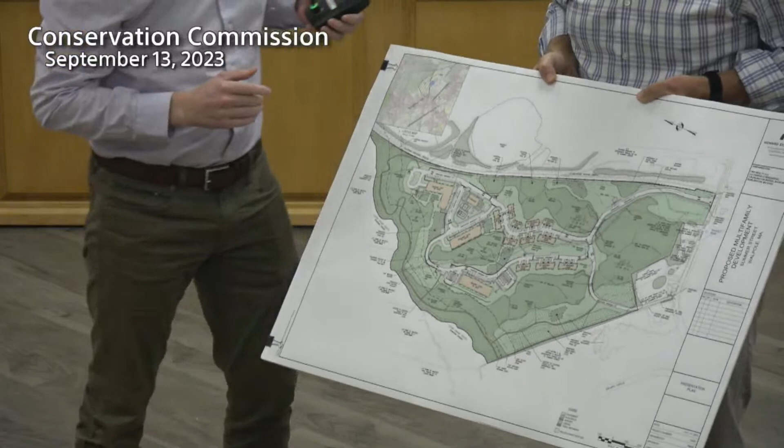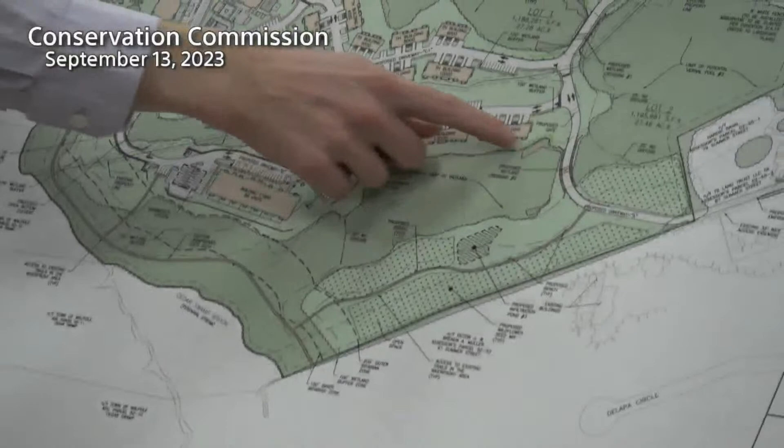Just stick that in place for the stuff. Yeah, we can kind of both go through a little bit. So the peer review went through and looked at the changes as part of the modification. The primary changes added as far as drainage infrastructure goes are the 2 additional StormTechs here and the infiltration pond that takes the runoff from the emergency access section. Tetra Tech had some additional tweaks they wanted to the infiltration rates since there wasn't direct testing under the system, so some of those in situ testing methods were used for the perc rates. We agreed with their analysis to change those to 1.02, which had a small increase in size from the past plans you had seen. That was the most conservative rate, and we thought that was a good way to deal with the situation, so we agreed to do it.

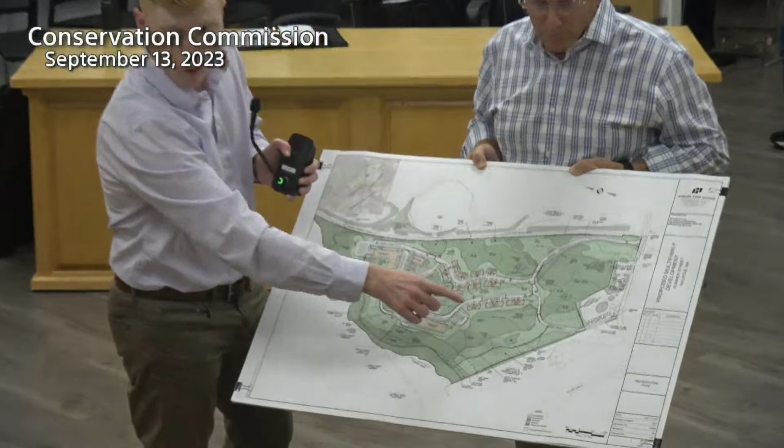So these reflect the size that you see here. The other notable change is this section of the emergency access used to be 24 feet wide over the crossing, then necked to 20 feet. There's no additional development happening on this side other than the infiltration pond. One of his comments was to maintain 20 feet the entire way instead of going to 24 feet. So that's been reduced, and subsequently the crossing has been slightly reduced as well, reflected throughout the plan set.

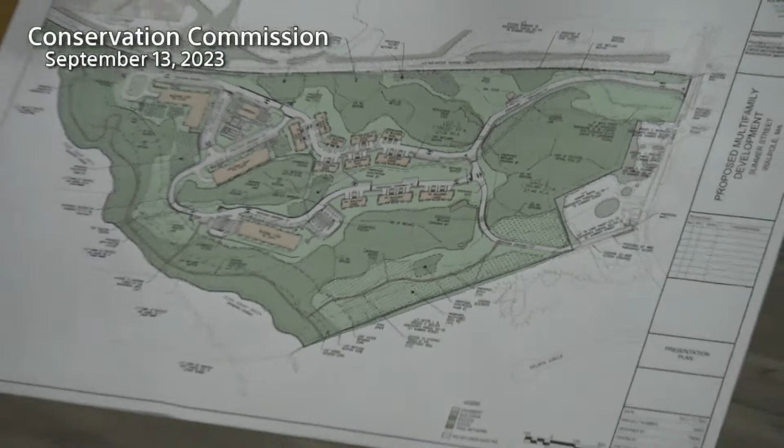Additionally, there's the wildflower seed mix being proposed throughout the cut areas that aren't proposed to be maintained as grass, like for an access berm or something like that.

And then we have the trail shown here. One of his comments was, instead of having it come to the maintenance berm of the infiltration pond as previously shown on the approved plans, he wanted it extended all the way up to the emergency access. We've done that, as well as moved it outside of the 100-foot buffer. Landis also asked that we move it a bit away from the detention basin so people wouldn't throw their dog waste in it, which we've done. We've also added three benches for viewing wildlife, and the signs for pet waste are over there as they were in the approved plan set.

Those are the primary changes from the peer reviewer. There were some other comments that he made.

He had a question about the culvert under driveway D here. I think he was confused that it was originally a stream, and it wasn't. It was going to be just a drainage pipe that we agreed to make a culvert so critters could go through it, and for drainage. Yeah, it's sized, it's oversized actually. We oversized it for the critters if they wanted to pass through, but it's not subject to Mass stream crossing standards.

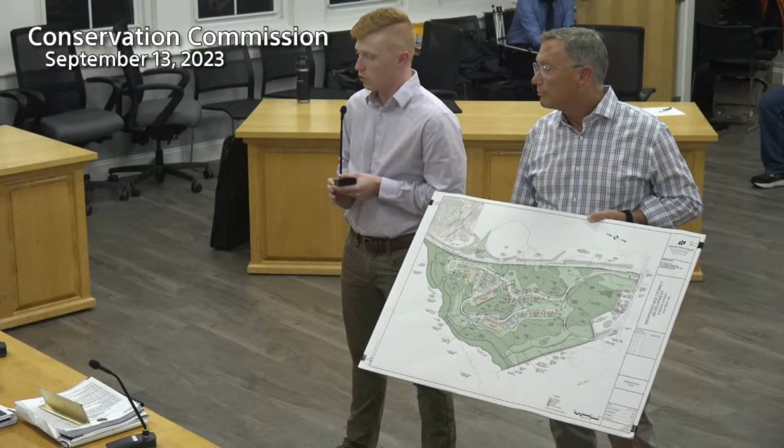But I see that some of the units have underground parking. Yep, they do. As was also in the decision, we had to maintain at least 1.88 spaces per unit, which we do comply with. There's a parking chart, I believe on the sheet you're looking at, bottom left-hand side, that details the parking per type per unit. So this does accommodate 1.88 parking spaces per unit. Yes, did you say 1.88? 1.88, yeah.

When you just look at the drawing, it doesn't look like there's enough parking spaces, but having parking spaces underneath the buildings helps. Buildings 1,000 and 2,000 both have garage unders, and then there are garages within the townhouse units, which also count towards that factor.

People love the garage unders. It keeps them from having to chop the ice off their windshields. I just moved today to a place that has parking under it, and I love it.

My only comment is a positive one. It took a long time to get the walking path to connect to something on each end, and I notice it now connects in three places, which is even better. That long battle to get the walking path to connect to something, aside from just the fact that it was there, I think is a positive.

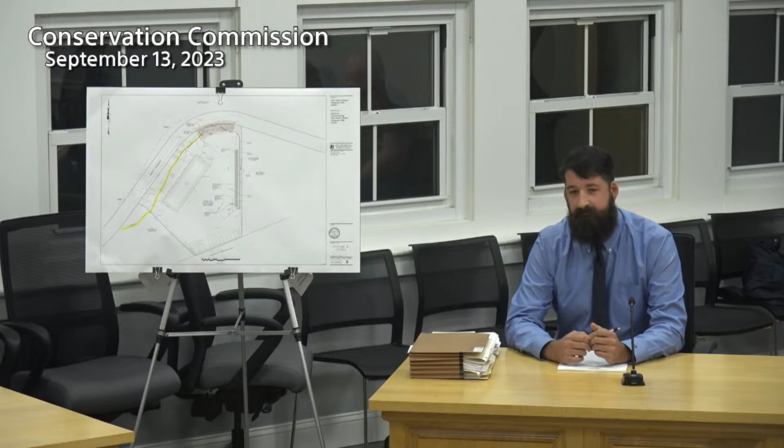Lynn? Yeah, I spoke to Carl, and he's satisfied that the revisions addressed his comments and the requirement to upgrade the system based on the NRCC revised rain data. So everything seems to be in place. Okay. Bailey? No questions. Doug?

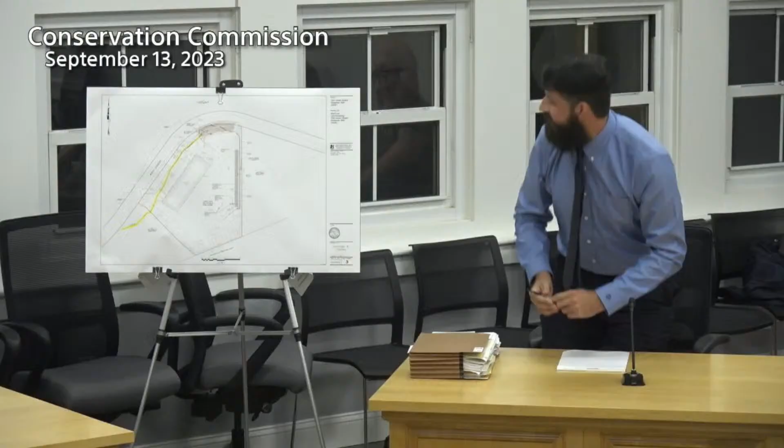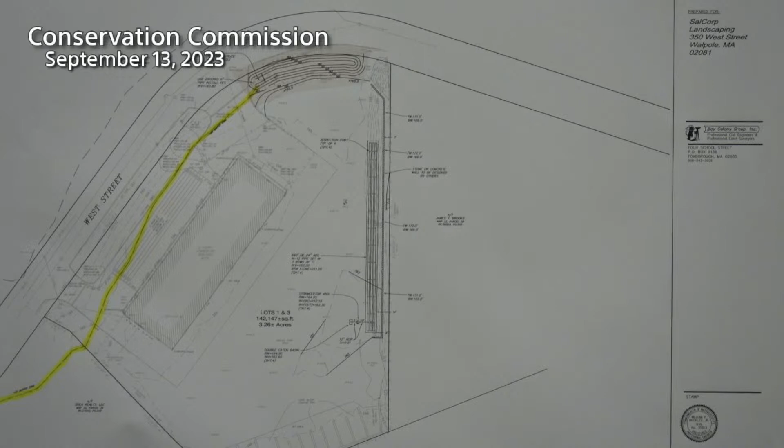No questions. Al? Okay, my question is, how does stormwater get to this new row of infiltrators? So if you look back here, I have a proposed double catch basin, and then that feeds into a drain manhole, which feeds into my row of infiltration chambers there. So he chose a natural low area that's already on the site there. So you're expecting all the rainfall in the back here to go to that one catch basin? Yeah, so based off our topo that we did when we did the existing conditions, you can see that although it's not massive slopes going back there, that's where the water wants to go, sloping back to that area.

See, now I have a problem with that, because when I see all this flooding and washing out of drain systems and such, because the system can't handle the flow of rainfall.

Okay, so I'm not satisfied that one catch basin for that whole area is sufficient. I would think you'd have more than one. That's the only thing, I have no problems with anything else. I just have a problem with the size of conveyances that are supposed to carry this rain. I've seen rain this week that wouldn't fit into a small pipe, that would wash the pipe away before it would fit into it. And you saw that if you watched the news for Attleboro or Leominster, it just washed the pipes away. Yeah, because the system couldn't handle it. So I think we missed the boat when we only have one catch basin for a system as big as that.

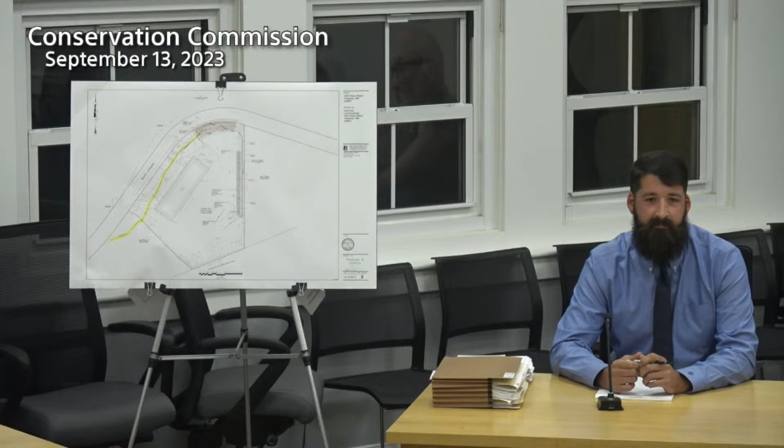Currently it's crushed millings that's compacted, so he uses it as a contractor yard and stores equipment. He's a landscaper, so he has numerous excavation things and stuff back there. So it's compacted, so you wouldn't get a lot of infiltration? Yeah, no.

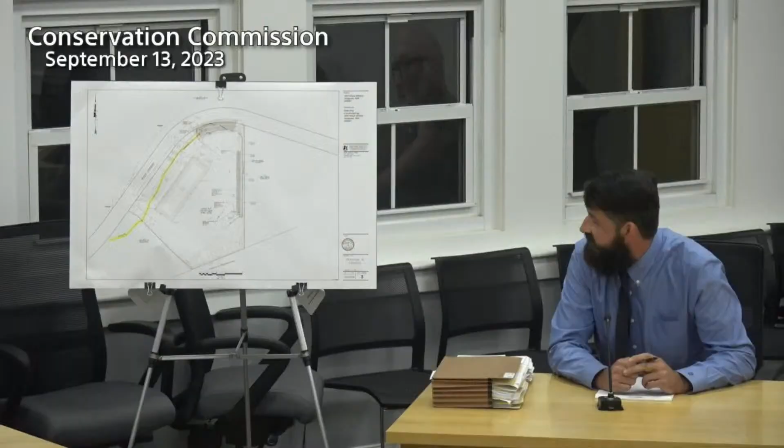What area is that catch basin serving? It's catching everything from the back of the facility. If you look at my contours here, you can see this contour right here is 165. So up by the building I'm at 166. So everything is pitching towards this low area right here. So I have my catch basin where I thought was the most reasonable spot, where all that storm water is already going anyways.

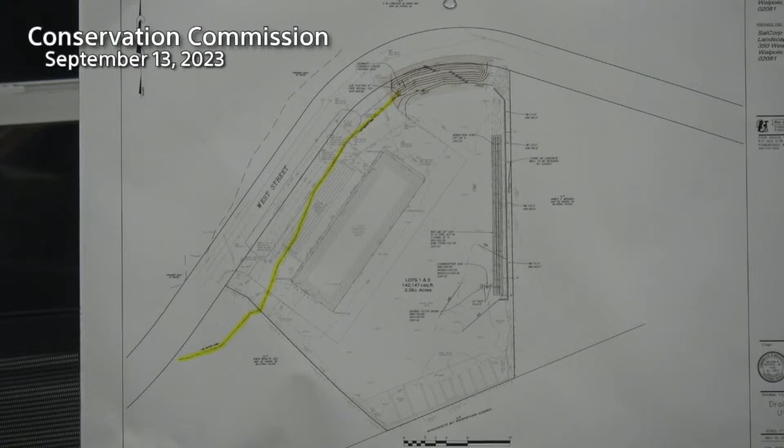Okay, and that, I'm just wondering from Al's standpoint, could that 12-inch pipe be enlarged, or is it already large enough? I think the 12-inch pipe is already large enough. When I first did this original design, this site plan was permitted by Glosson Engineering. His original design showed an infiltration basin essentially on either side of this site. We just moved it over so that way it's one infiltration basin on this side, rather than two separate ones, and it's larger now to accommodate it. Also, Glosson's numbers were designed to the old stormwater standard regs, so now we're using the NRCC, which is a higher storm standard. So when I looked at it, this design is able to handle that 100-year storm without any stormwater leaving the site.

So all the volume is going to retain on-site in terms of that back area, and it won't be overflowing into West Street or anything like that. Okay? Al, do you have anything else? I'm not going to say anything else, I've said enough.

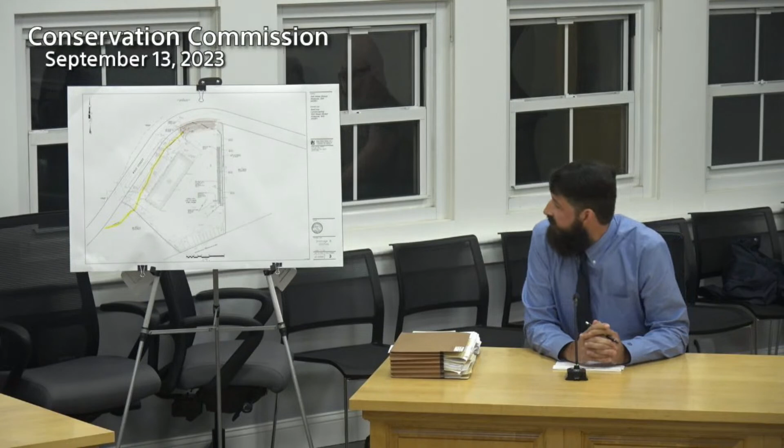If it is slow taking that water, you've got, it's higher, just under 165. What was it? It's 164.9, yeah, for the rim of my catch basin. You've got a 166 contour all around the back of the building. Yeah, and then I have a whole bunch of spot grades back there just to show that it's actually going towards that area. My point is, where would it go if it is slow taking that runoff? Where is that water going to go?

So we designed it so that the 100-year storm, if it were to pool up, it's not going to overflow out of that back area. It's still contained in the back area, which is a fairly large area. This whole back area, it would have to really fill up, since this is the high spot in this area, to get over to West Street. It's the same thing over here. It only gets higher, so it would not be leaving that whole back area. Essentially, it's kind of a bowl within itself.

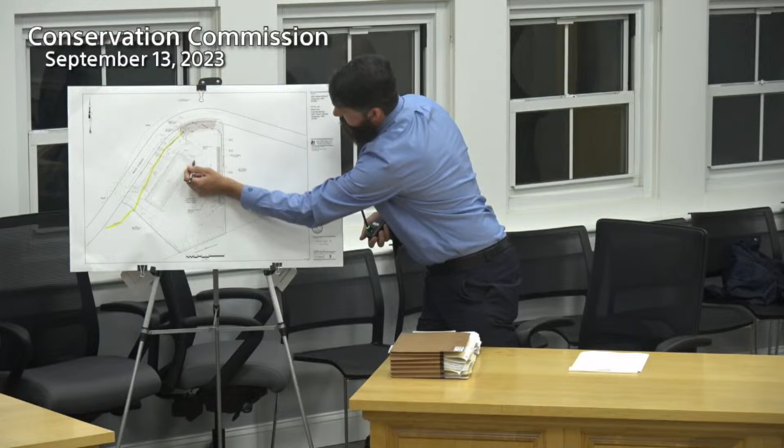Do you have that 166 contour all the way between the building and West Street? Looking up there in the corner, to the north, yeah, so the 1.6... outside of the building, is that the 166 contour? It's very light here, I can't quite make it out. Does the 166 contour go all the way across? So this 166 contour goes like that and comes in, and then there's a peak right here, and the 166 contour picks up again back over here. It's along the whole front of the building, and then same thing over here. This 166 contour comes up and then loops back into the building there.

Okay, so you've got that whole area that could act as a pond if necessary. Yes, essentially. I think that takes care of that, good point for maybe other sites. Yeah, I think for this site itself, it's sort of self-contained.

I think the other thing we have to consider is that we have to live with the specs that are published for rainfall, even though we're seeing some different results, and unless we want to change them ourselves, I don't think we can impose that on a specific case situation without making it a general policy.

Anyone in the audience have any questions or comments? Please identify yourself for the record. Yes, Doug, just a quick question. I see on the drawing there's some underground gas tanks. Is there any more information on what that's all about? How big are those? I'm not entirely sure.

So we came into this, like I said, after they already had an approved site plan, and he didn't build the drainage exactly to that site plan, and he wanted to change things. So we went out there and did our existing conditions, and I really just looked at the drainage. I think it's over on the south side, on the left side of the drawing I'm looking at.

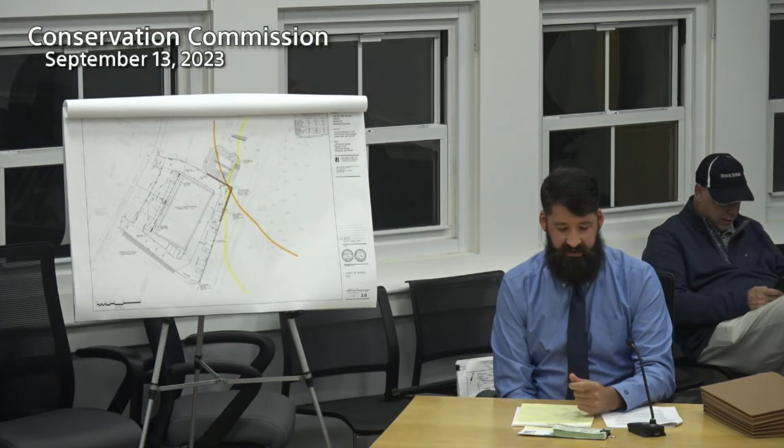It is in our opinion that the redevelopment would fall under the Wetlands Protection Act under section 10.58, which would allow the redevelopment of a previously developed riverfront area. I could go through those and show how we conform to that if anyone would like me later. No work is proposed beyond the area of the site that is currently developed.

And I'd like to point out, so you can see again, I have my orange riverfront area as well as my buffer line. And we're proposing a very small amount of impervious area now, as opposed to the existing conditions that are out there.

So the proposed building will be about 133 feet from the wetlands and 239 feet from the riverfront, where the existing building sat about 87 feet from the wetlands and 160 feet from the river. The proposed paving and grading area will be about 91 feet from the wetlands and 191 feet from the riverfront area. The existing paving and graded area is about 84 feet from the wetlands and 134 feet from the riverfront area. So both are an improvement on the existing conditions currently out there.

So there are no stormwater structures on the property currently, so all runoff just sheet flows off the property. So we're proposing a stormwater system that will capture the runoff from the roof of the new building and pipe it directly into a new subsurface infiltration system.

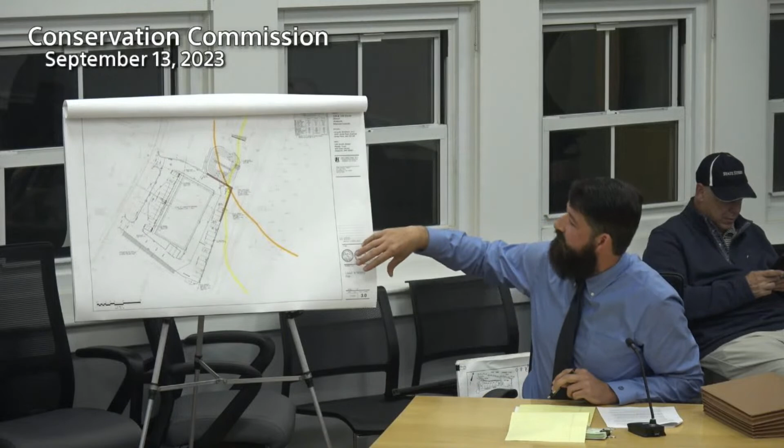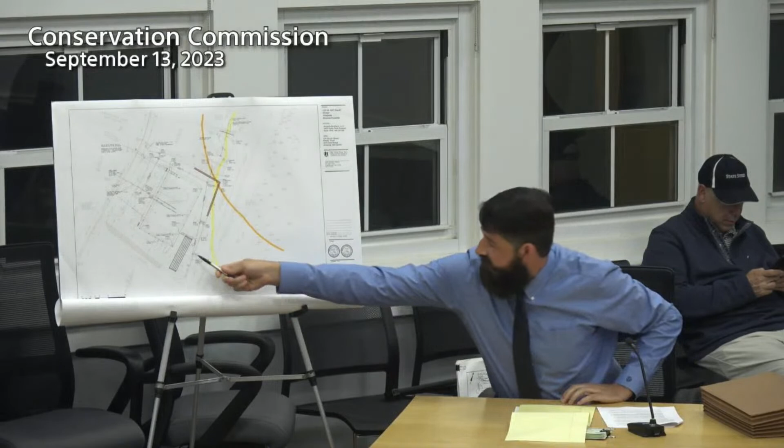I don't have it on sheet 3, but if you glance at sheet 4 real quick, you can see my roof infiltration system in the back left corner, here.

If you'd rather move closer, go ahead. Come, slide your chair closer. Sit wherever is more convenient for you. And are those plans there that they can look at? Yes, they were dropped off. You should unroll them. No, those are... I'm sorry. Okay, all right, go ahead. Okay, sorry, no problem.

And then the parking lot will be directed into a surface infiltration basin. That is located, if you look in the center of the sheet, right up here. So the system has been sized to accept all storms up to and including the 100-year storm without discharge. So no stormwater will discharge from the site.

The site will be serviced by municipal water and sewer from South Street, and we have established an erosion and sediment control program to mitigate the impacts to the nearby resource areas, as detailed on the site plan and stormwater report. That concludes my presentation.

Landis. Yeah, so Carl and I sat together and went over some of the items in his report that we would like to be addressed. I sent an email with some of the items prior to talking to Carl.

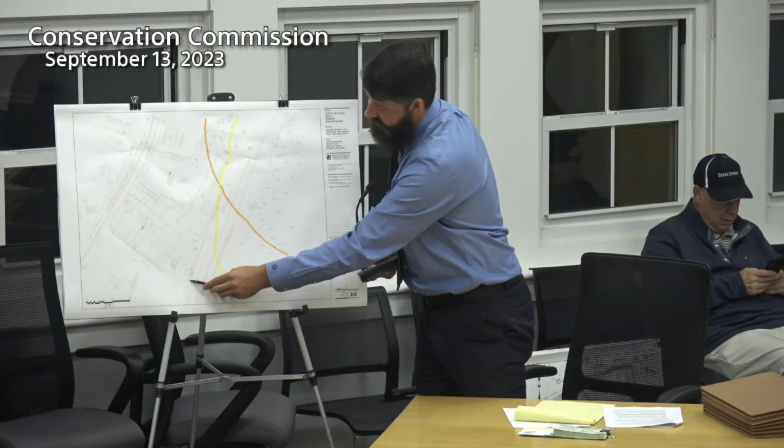So the wetlands are off-site, on the other side of that rail trail and down a slope. I'm not sure where you would... I don't think plaques would really be applicable on this application. But yeah, it wouldn't, okay.

Anything else? No more comments, thank you, Barry. Doug? The only thing, just want to mention, looks like some typos on sheets 3, 4, and then the last 5 pages. It shows the scale as 1 inch equals 20 inches.

I think that's supposed to be 20 feet. It says that on page 3, and 3 and 4, and then the last 5 pages all have that scale. It's just a typo, that's all I noticed. Anything else, Doug? That's it.

Okay, Al? Well, first of all, I'd like to see the lines for the wetland and the riverfront so that you can see them. I don't know what's the matter with their printer or their computer system, but that's the important part of this plan, and I don't see it.

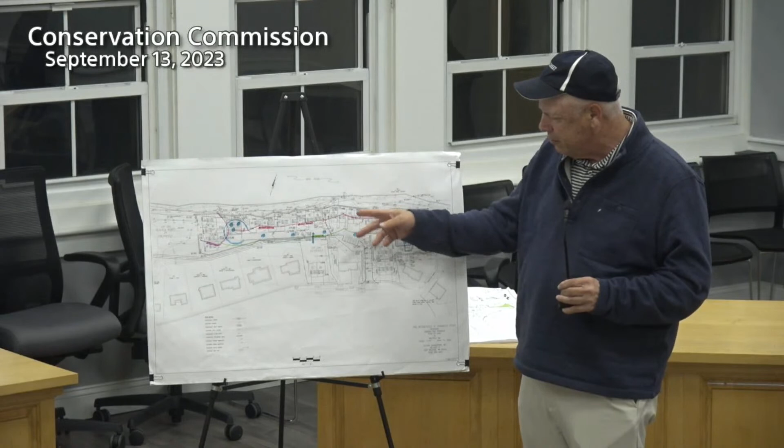And it's necessary for us to go on the site to do various testing - soil testing, surveying, and other things necessary to finalize plans. Since we last met, I've submitted this plan at Landis's request to identify the various buffer zone areas. This is the 50-foot buffer, the 100-foot buffer, and I think the riverfront area is on here somewhere.

Since we met, I've been on the property and we've cut the brush that was quite frankly overgrowing the property, which is necessary for us to get into these areas. What I've identified here is the areas where the soil testing for stormwater management is required, and also...

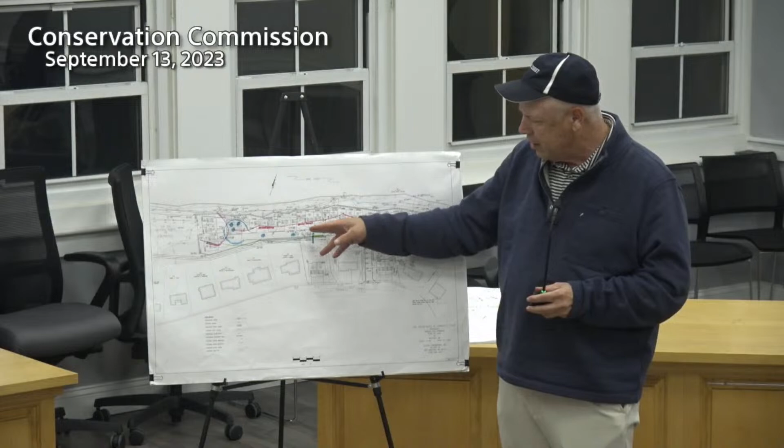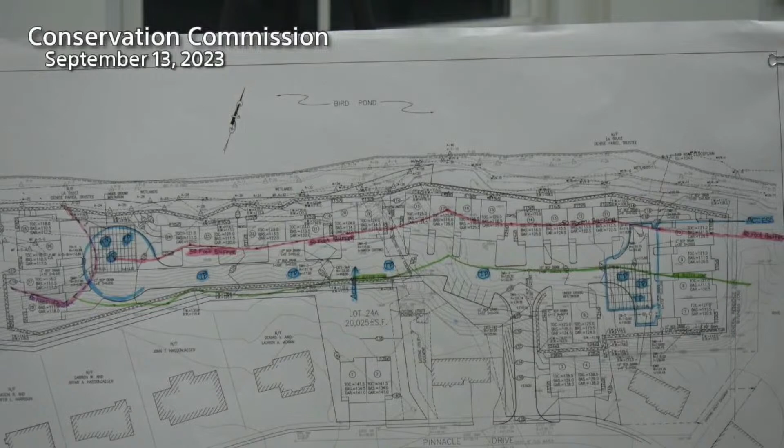...some test pits along the upper portion of the property where the proposed roadway will go. If you folks remember, you've been on the property - these are areas where lots of dumping has taken place, and it's important for us to find out what's underneath the areas that have been dumped. So we've identified these areas, and we've actually provided access to those areas, similar to this particular highlighted plan that I've submitted.

It was wide enough for us to get a brush clearing machine, a rubber-tired machine, into the property to do what we need to do. But essentially, whether it's neighborhood objection or we don't own these strips of land that go across the back and sides here, we've created our own access from Pinnacle Drive in this general location, outside the riverfront area, so we can access the property with the equipment we need.

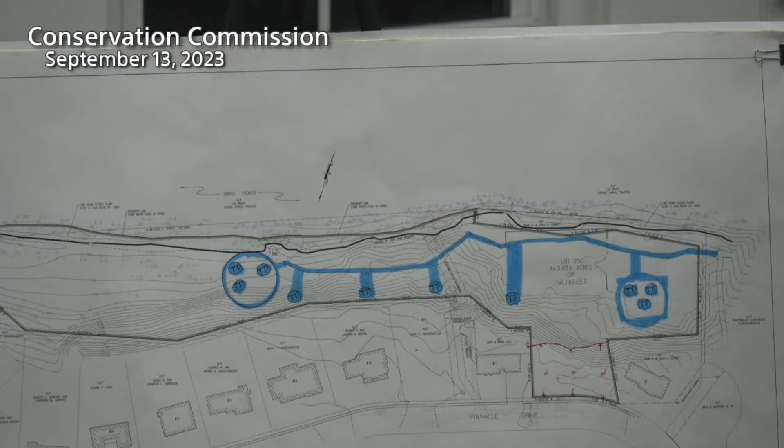So for the most part, the only thing that remains to be done is to get on the site to do the soil testing with a little bit larger machine than what was anticipated before, with an excavator to move along the property and dig these holes. And it may be necessary to use a machine with a hydraulic hammer on it, to break through the concrete to actually expose the material underneath. So it's a little bit more complicated than what I first thought, but it has to be done in order for us to prepare our plans.

So that's pretty much it for this particular aspect. Okay, Landis?

So you submitted an RDA for 9 Pinnacle Drive, requesting the commission to make a determination if the area depicted on the plan is subject to the Wetlands Protection Act, and if the proposed work is subject to it. You stated 10.02 to B2C, vista pruning for minor activities at least 50 feet away from the mean annual high water line of the riverfront area or bordering vegetated wetlands, or 10.02 to B2G, activities that are temporary in nature for planning and design purposes. And you were waiting for a determination from the commission on this RDA.

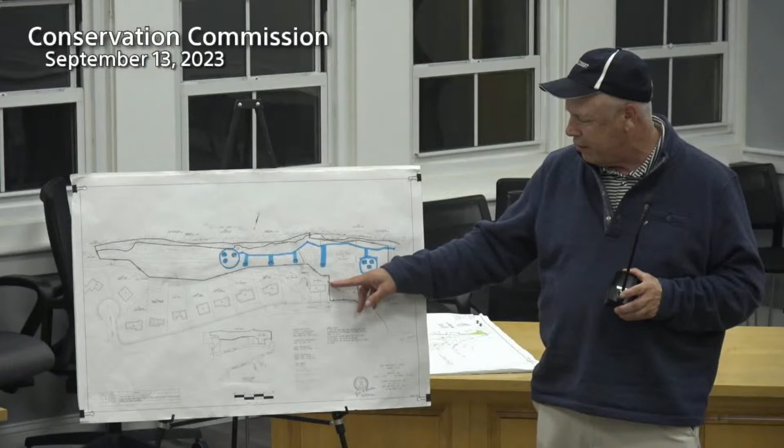With respect to that, if you are doing work, I don't know what area that is within, the riverfront or the buffer zone? There's no buffer zone, well, this is the 200-foot riverfront area. Okay, so if you're doing work within our jurisdiction, you would need to do a filing. That's all the point I want to. No, and at this point we've... okay.

I believe we've only gone to this point, and you have to jump. Okay, I'm down, just so you're aware of that. Okay, Doug, any? Jack, yeah.

Is the question whether the work he did out there was already within the 100-foot buffer zone? No, just looking at the access, if there's work done there. I don't know, what is the address of that access? This is 9 Pinnacle. Okay, it's the same lot. So it's all 9? We're all dealing with the same RDA.

So I could amend the RDA and say I need another 50 feet of access down that slope? That's the point - if you do anything within our jurisdiction, you need to come back and do proper filing and a plan showing us what you're going to do. So that was addressing Bailey's comment. Anything else, Bailey? No, thank you.

Doug? Yeah, I thought you made some good points - that if you gotta make a cut to get your equipment down there, you'd want protection with hay bales or something against water flowing down. Well, it flows down there now. But where you're gonna be disturbing the soil - not to be disrespectful, but this is a concrete slab here, there's no erosion going on that's going to alter the concrete slab. The point is, whatever you're doing, if it's within our jurisdiction, you need to show us on a plan what you're gonna do.

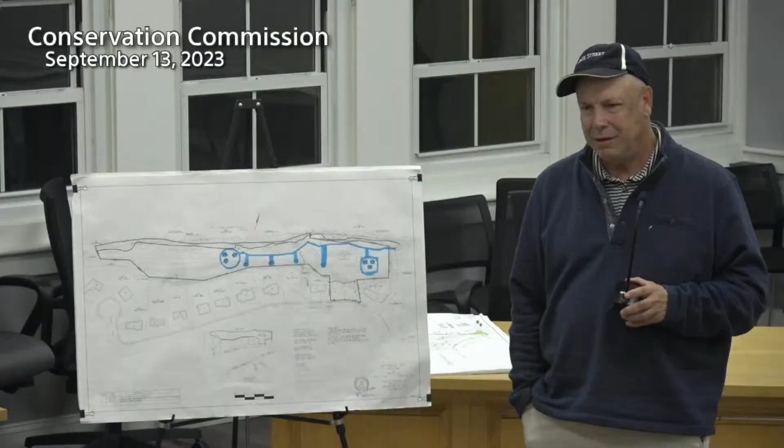Is there an engineer actually involved with this? Of course there is. So why do we not see the engineer very often, and why didn't the engineer show us what we typically see? It just doesn't seem very professional. You realize these are exempt activities, right? I really don't even have to ask permission to do this in front of the commission.

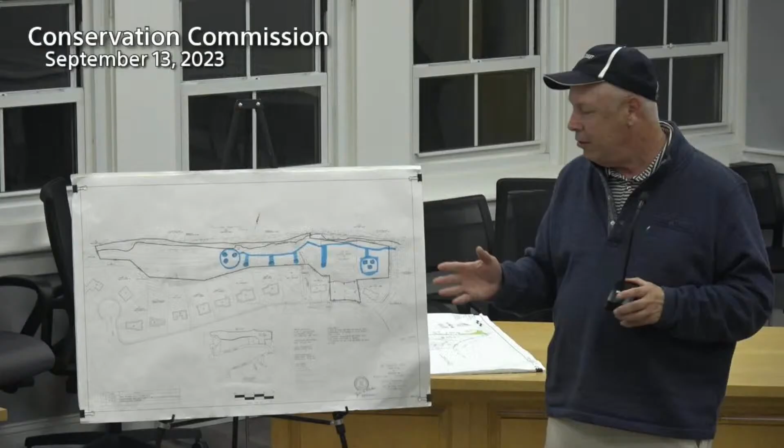That's debatable. Right, it is debatable. I guess if the question is - I'm here because I asked Landis, and Landis suggested I file an RDA, which I did. The RDA does not - and I'm giving you the general location. If you don't like my coloring, I'm not spending thousands of dollars on an engineer to satisfy something I can do as of right, okay? And it's for something we know is previously developed and completely degraded.

We've had this conversation before, we've had other hearings before, we've had other filings before. We're trying to do testing on the property, it's an exempt activity, and we also have personnel that have to get onto the property and do things - we're not having them with their machetes trying to cut through this brush to do their work. It's just not gonna happen that way. So if you have objections to whether there's an engineer involved - yes, there is an engineer involved, and they'll be here when the plans are filed for the project we intend to build, which will also depend on... so has an engineer actually located the two drainage basins?

Well, the engineer has drawn them out, so we know approximately where they are. This plan may change depending on what we end up doing - we've had conversations with neighbors and the neighborhood, and we have to have conversations with the Conservation Commission and the zoning board. This is a process that takes time.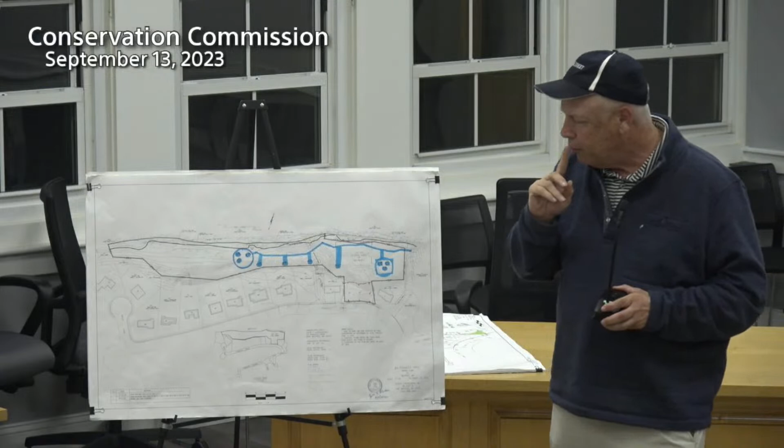And you made a path from the one on the east side to the one on the west side. I don't know if you cleared to where those little stubs are off the path. As it turns out, after you get beyond this area, there's some fallen trees here that had to be moved.

Most of this area was fairly loosely vegetated, it wasn't thick stuff, and the areas going up to the slope are pretty much exposed. We didn't have to do anything up there because it's debris that's been dumped there. The main area we cleared is primarily right in here, this section. I think on my previous plan I outlined the area I wanted you to clear - we cleared that area, yes.

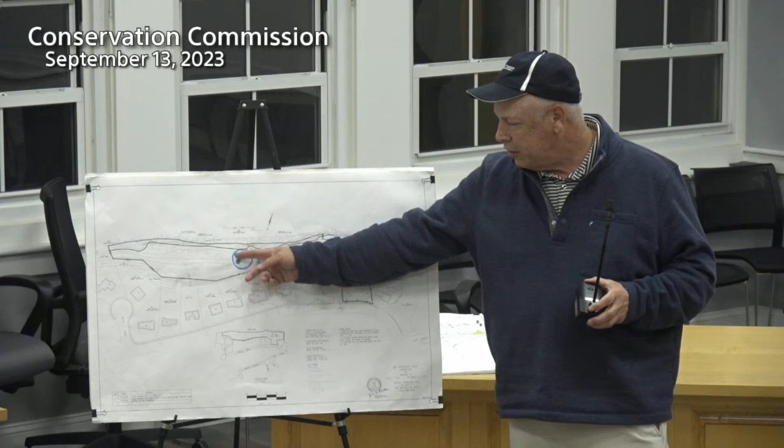And what about at the far end, the westerly end? All we did was clear this path - it's barely where people historically have walked. Where you had that circle on the westerly end, this one right here? It was not required, the vegetation wasn't required to be very much, there's a lot more heavier type spaced out trees there.

We didn't clear that area, no - it's just the main part of the walking trail or what was there. The main area of clearing was down in here, which was in excess of what you needed to get to the trail or get to your spots of where you tentatively planned to do your tests.

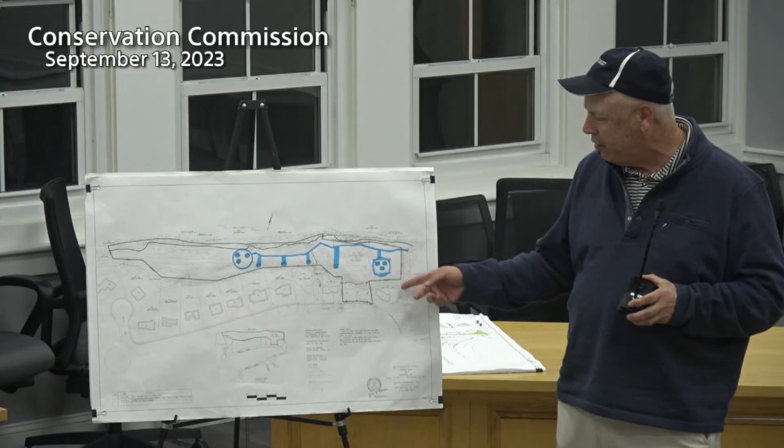Well, we don't know - when we're out there, we may have to do other tests in this area, suppose this area isn't suitable. The point is, the act allows for preliminary testing to see what is there, and I think it also includes a minimal amount of clearing to accomplish surveying - but what you've cleared is a lot more than necessary to do a test pit. Under that provision of the regulations, yes, but if you look under 10.584...

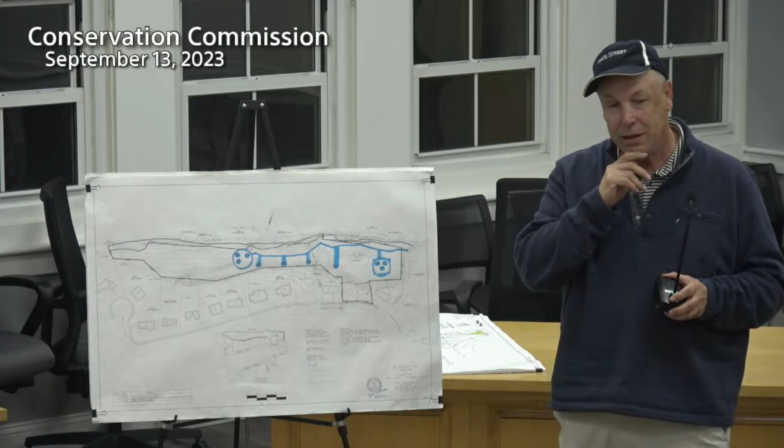There's a different standard for existing parking lots and driveways, which this falls under. So we think that... and how does it fall under that? You're talking about the historic mill complex? No, I'm talking about 10.584, which is ahead of 10.585.

And how did you make that determination that your clearing falls under that? I read that regulation - I don't have the wording in front of me, but I checked it out with legal counsel and they said we're entitled to do that. That's what the determination was for. I will keep going back to the determination, because that's what you filed for the commission to determine whether what you were doing fell under certain sections of the Wetlands Protection Act.

That's not what it says. You jumped in and made the determination yourself before the commission could weigh in. Yes, I did, based on legal counsel, I don't make these commission decisions myself. Well, maybe so, but it's not maybe so, it's yes, so.

If you're falling under those sections of the regulations, and you file a determination, the commission weighs in on that. Do you fall under those regulations or not? Not on the 10.584. I'm exempt under that regulation.

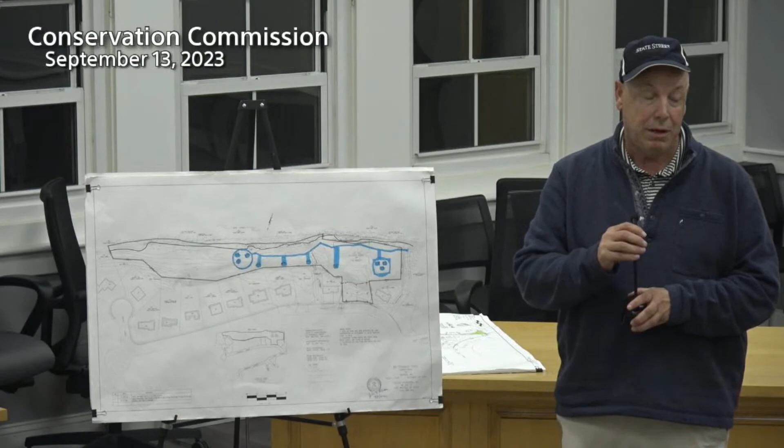Are you talking about the historic mill complex? No. Then what are you talking about? I don't have it in front of me. Did you submit that? I think the last time you were before the commission, the commission asked you to submit more detailed information on what you were planning to do.

We never got any of that. I got emails, but the commission never got any documentation, and now you're saying you fall under 10.584, which is the Rivers Protection Act.

Right, for previously developed properties. But it hasn't been determined to be previously developed. What are you talking about? When was it determined to be previously developed?

It's historical evidence, we don't really need to go there. Yes, you do, we all know it's previously developed. It has to be determined to be pre-developed. It has not been determined to be.

I'm not going to listen, Mr. Chairman, I'm talking to the commission now, I'm not talking to you. It needs to be determined to be pre-development, it has not been determined to be pre-development.

In the past RDA, what was submitted was that it was a historic mill complex. We're still waiting on that determination based on the adjudicatory hearing. So I'm not sure why all of a sudden this work is being done under 10.584, which is previously developed riverfront area.

That's always been part of a filing or determination that wasn't part of this RDA, and the commission never got to weigh in on this determination. Okay, I think the commission should move forward on this hearing.

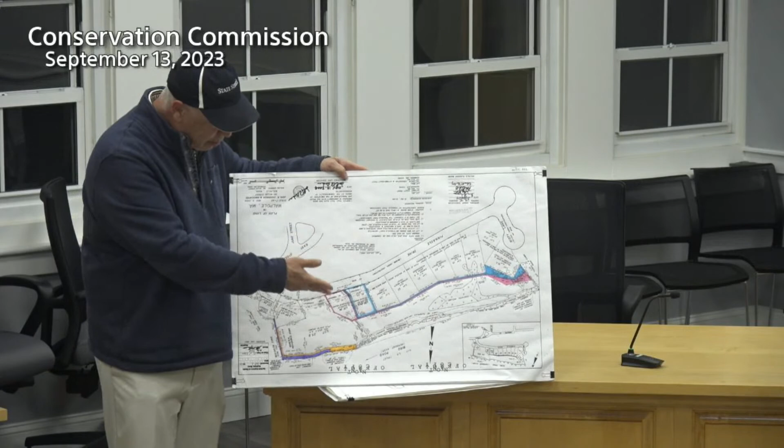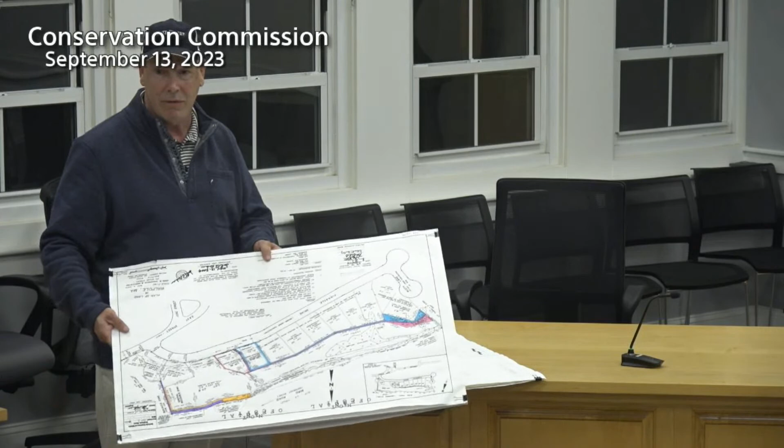It's half of the site, so I just don't see, whatever you conditioned, if you don't reconsider it, I really don't see any possibility of you having a continuous trail going through the property at any point. So I'll leave that up to you folks to decide.

And like I said, if there's no outside participation individually, as a neighbor, or as an abutter- I mean, you guys go to sites all the time- then we'll just come back from time to time, or under a filing, to start the dialogue going forward. But we may know some stuff tomorrow, who knows. All righty, okay, thank you.

So you still have an open discussion, which has gone all over the place in regards to the RDA, so what should the commission do about it? Talking to the commission, I think we've made our ruling on that. Now, as far as comments, you have to make a decision.

Is it a positive determination? Is it a negative determination, based on the items he's requested? Is it within the Wetlands Protection Act? Is the work as proposed falling under the sections that were written into the determination?

Which is more- okay, I think it has been- the work on this application for 9 Pinnacle Drive does come under the Wetlands Protection Act. It's within the buffer zone and within the riverfront area.